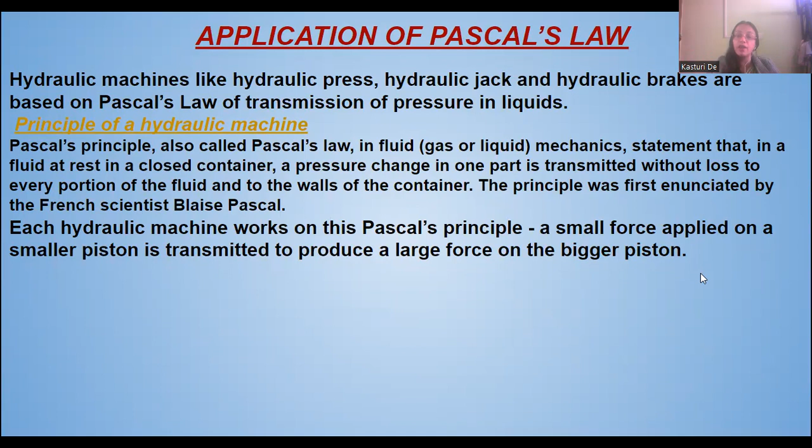Okay. And when the machine works on Pascal's principle, by applying a small force on a smaller piston, a large amount of force is transmitted to the bigger piston. This principle is applied in all the hydraulic machines. Okay, in the previous video, we discussed the hydraulic press. Now we will start discussing the hydraulic jack, also known as hydraulic lift.

Okay, now the hydraulic jack is used to lift heavy vehicles at service stations for repair works. What does it work for? It is used in repairing works, where there is repair of vehicles; heavy vehicles can be lifted by applying a small force. Okay. Now, how is it constructed?

See, there are two tanks, two vessels, one is P, another is Q. And they are connected by a tube which is known as R. Two pistons are there. Piston A is in the P vessel, and piston B is in the Q vessel. Now, the tank Q is wider than P. P is a narrower vessel, and the Q cylinder or Q vessel is broader.

And the vessel is filled with a liquid, say here water. There's a valve V in the R tube, and also there's a platform which is placed above the piston B where the vehicle is kept. Okay, and you can press the handle, and we will start with the working a little later.

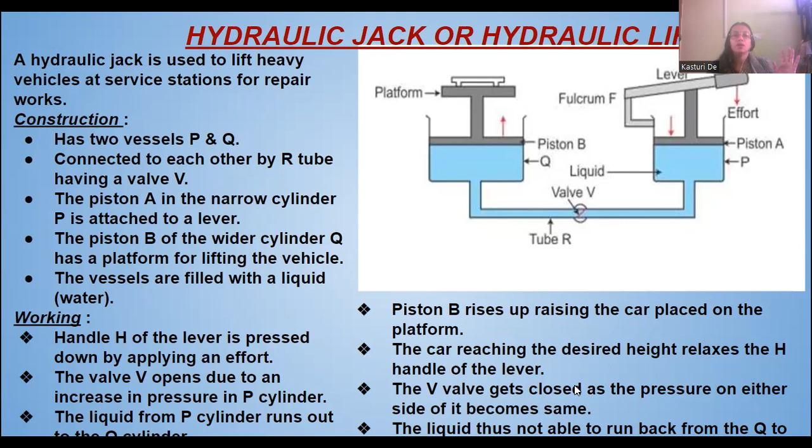So this happens when the hydraulic jack works. How it works is complete now. Next, we move on to hydraulic brakes.

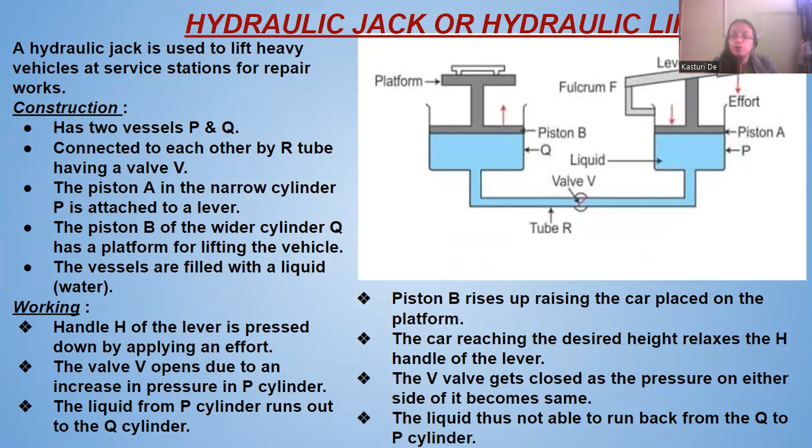Now, why are hydraulic brakes called hydraulic brakes? It is named so because they create braking force through hydraulic pressure. In this hydraulic machine fluids are used. But why don't we use gas? Why do we only use liquid? Because liquids are incompressible, and that's why gases are not employed.

The liquids which are placed in these hydraulic brakes are known as brake fluids. Make it a point that brake fluids are not gases; they are only liquids. Now we come to the construction of the hydraulic brakes.

It has a master cylinder which is called P, and another cylinder, the wheel cylinder, Q. The cross-sectional area of P is much less than that of the wheel cylinder Q. There is a piston attached to the master cylinder, known as piston A. Two pistons are attached on the wheel cylinder, piston B1 and piston B2.

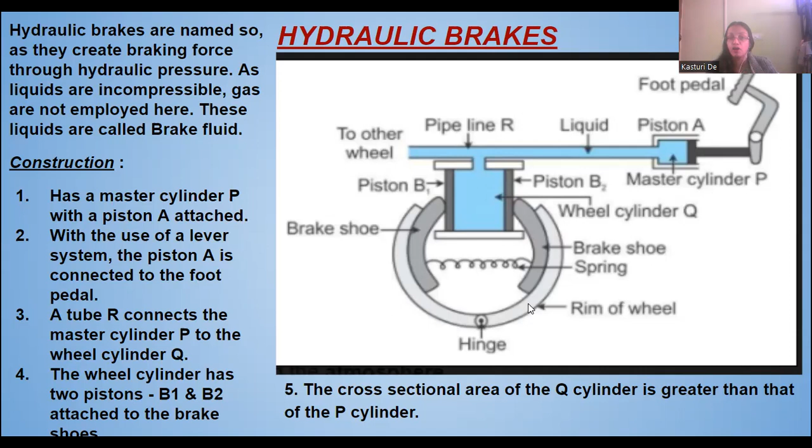Clear? Now we are moving to the working of these hydraulic brakes. When the foot pedal is pressed to apply the brakes, pressure is applied to the liquid of the master cylinder P. The liquid flows out of the master cylinder P to the wheel cylinder Q. As a result, the pressure is transmitted equally and undiminished through the liquid to the pistons B1 and B2 of the wheel cylinder. Both the pistons are forced to move outward. The brake shoes are pressed against the wheel rim. The wheel slows down.

As pressure is transmitted via the liquid, it exerts equal pressure on all of the vehicle's wheels connected to the pipeline R. When the pedal is released, the liquid returns from the wheel cylinder to the master cylinder P. The spring returns the brake shoes to their original position. Pistons B1 and B2 are compelled to return into the wheel cylinder Q. Brakes are released.

So how does it work? Let's come to the picture. First we apply brakes. We apply pressure on this foot pedal. When we apply pressure to the foot pedal, piston A is pressed and moves inside the master cylinder. The fluid inside the master cylinder will move to the pipeline R and into the wheel cylinder. Thereby, it will press piston B1 and piston B2 outward. When they move outward, they will press both the brake shoes to the rim of the wheel.

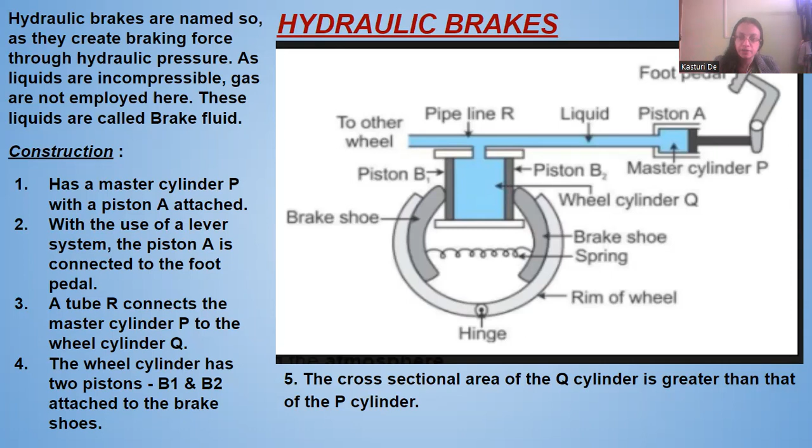Piston A will come out; it will move outward from the master cylinder. The liquid from the wheel cylinder will flow back towards piston A. When the liquid flows out of the wheel cylinder, pistons B1 and B2 will move inward. Brake shoes will also move inside. The rim will also move inside. The spring will contract and come to the original position. And then the brakes are released.

Okay. And the vehicle will start moving again. Okay. So this is the working principle of hydraulic brakes. Okay. So this much for today.

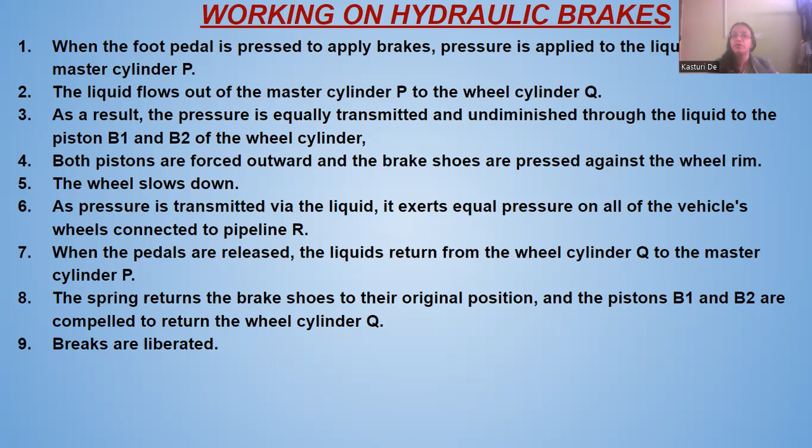In my next video, we will start with another thing. There is one notification, not about hydraulic brakes, but a general hydraulic machine notification. In all hydraulic machines, the effort is less than the load, while the distance moved by the effort is more than the distance moved by the load.

Okay, so effort is less than the load. Load is more, effort is less. The distance moved by the effort is more than the distance moved by the load, such that effort into distance moved by the effort is equal to load into distance moved by the load. Work done by effort equal to work done by load.

So mechanical advantage is equal to load by effort, which is greater than 1. In this case, mechanical advantage, load by effort, will be greater than 1. And velocity ratio will be distance moved by effort by distance moved by load. That will be also greater than 1. Hence, hydraulic machine acts as a force multiplier. It acts as a force multiplier. Okay.